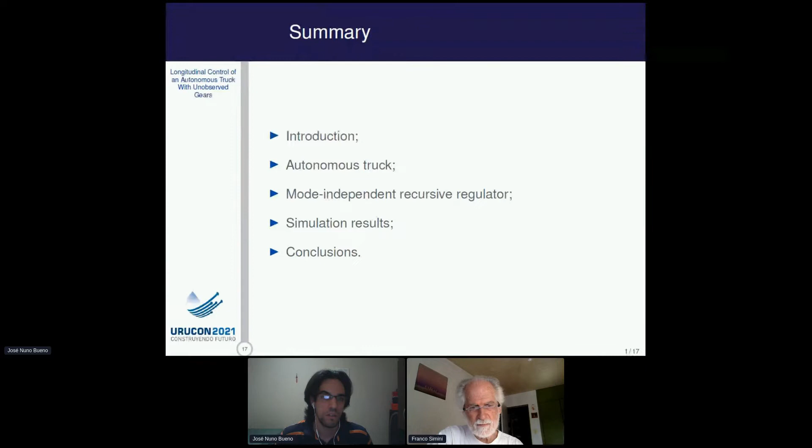Okay? So the presentation is organized in the following way. First, I will provide a brief introduction about the subjects we addressed in the paper, and then I will present and discuss the longitudinal model of the autonomous truck we adopted for this work. After that, I will present the mode-independent recursive regulator which we applied to solve the longitudinal control problem, and then I will present the simulation results. Finally, we will draw some conclusions about the obtained results. Okay, so let us start.

In the past few decades, Markov processes have been receiving more attention from researchers in the control area. Specifically, processes related to autonomous navigation of mobile robots, such as modeling, control, and filtering, can benefit from the Markovian approaches. To name a couple of examples, we have Savazzi and collaborators who use the Markovian approach to solve the localization and detection problem of robots in industrial environments. We can also cite Chhabra, Mathur, and Baths, who use the Markov-based method to address the navigation problem for a drone controlled via electroencephalographic signals by people with impaired mobility.

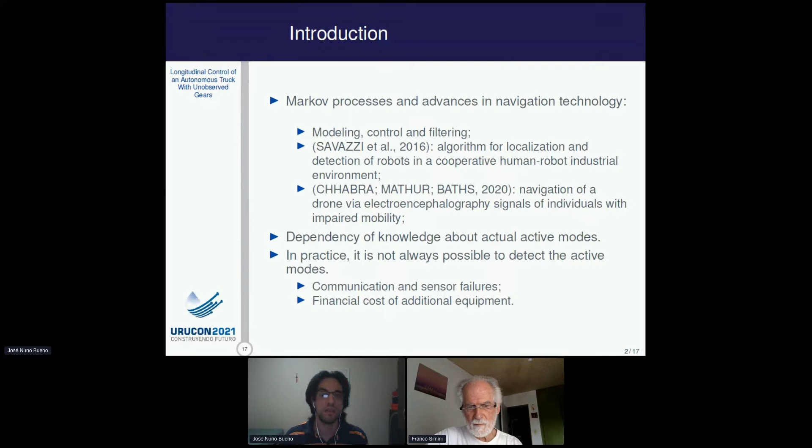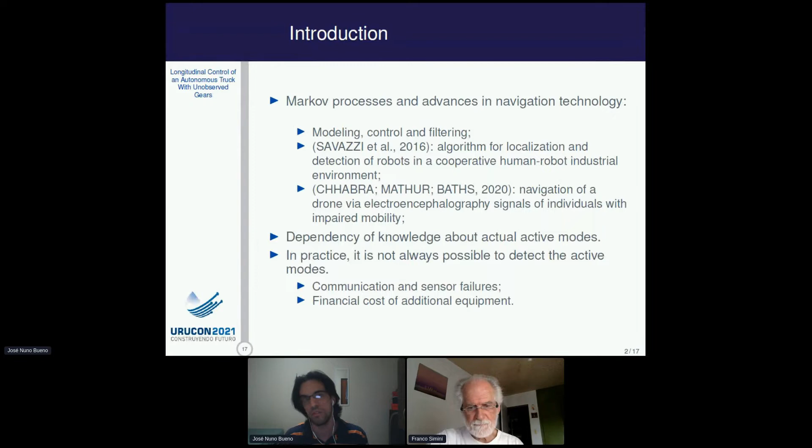In general, these Markovian approaches assume that the actual active mode is observed at every instant. But the detection of the active mode is not always possible in real world applications. In fact, the systems might be subject to communication and sensor failures, and the detection of the actual mode can demand additional equipment, such as new sensors for redundancy. It's important in this sense to have methods that do not require the observation of the actual active mode while the robot navigates the environment at all instants.

In this paper, then, we solved the longitudinal control problem with unobserved Markov modes for an autonomous truck. We modeled the longitudinal dynamics as a Markov process, where each engaged gear indicates the active mode. Then we define an augmented system based on auxiliary variables and formulate an optimization problem based on the classic least squares problem. The solution for this optimization problem will yield a recursive regulator, which we apply to solve the longitudinal control problem via state feedback. And then we present the simulation results to validate the approach.

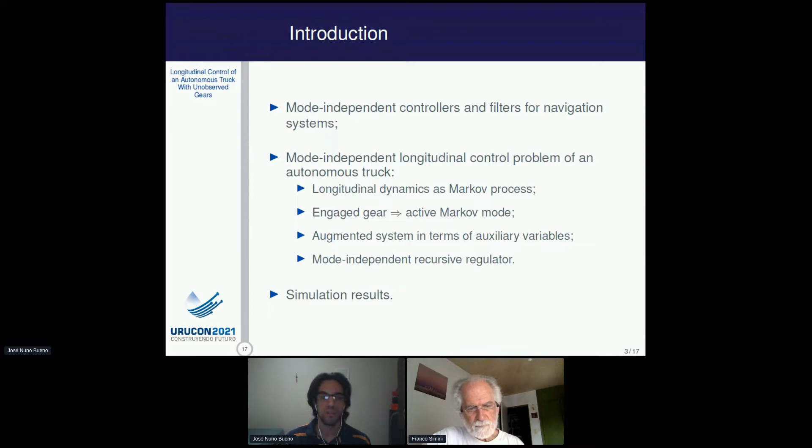So the autonomous vehicle we adopted in this work is the Scania truck presented here in figure 1. We consider that the system engages gears from 4th to 10th because the truck is unloaded. Okay? And we define the state space model given here in equation 1. In this model, the states are the drive shaft torsion, Q1, the engine speed given by Q2, and the wheel speed denoted by Q3. Okay? And our input is the normalized engine output torque.

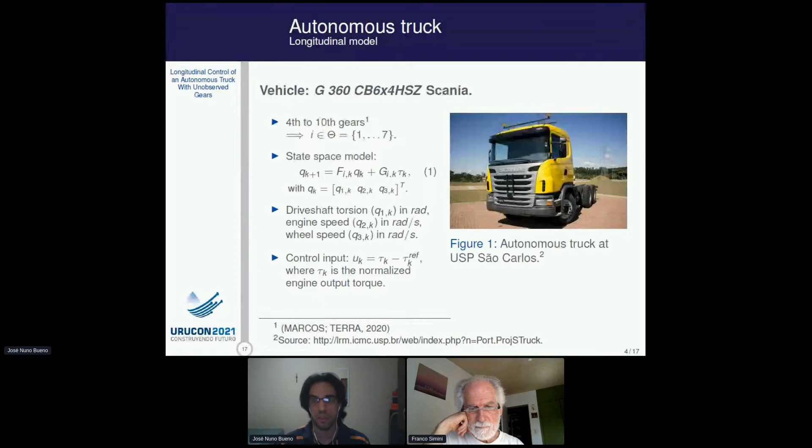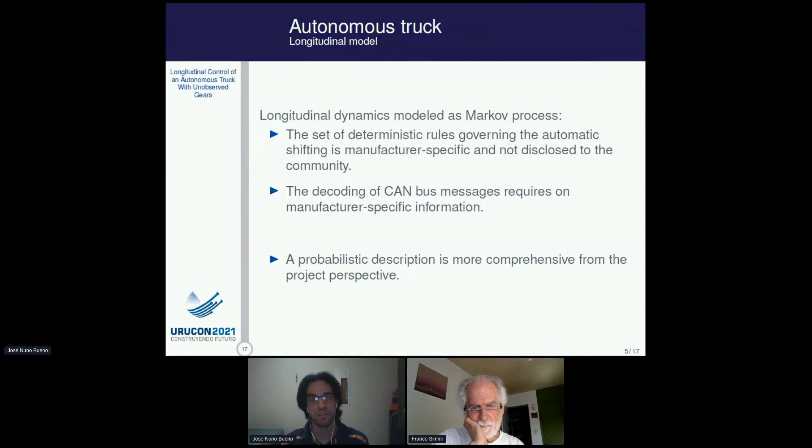And we model the longitudinal dynamics as a Markov process because in order to attain a deterministic model, we would need manufacturer-specific information, such as the set of rules governing the gear shifts and how we would decode and interpret the CAN bus messages. In fact, this information is usually withheld by the manufacturer and it's not disclosed to the community. Therefore, a probabilistic approach can be suitable to solve the control problem when we do not possess this kind of information.

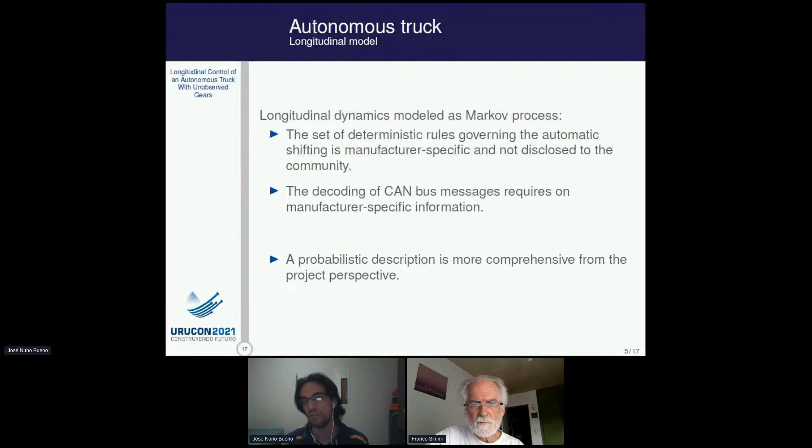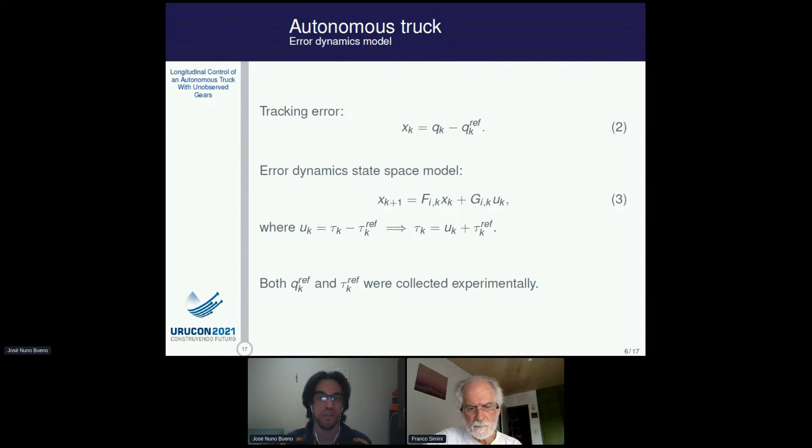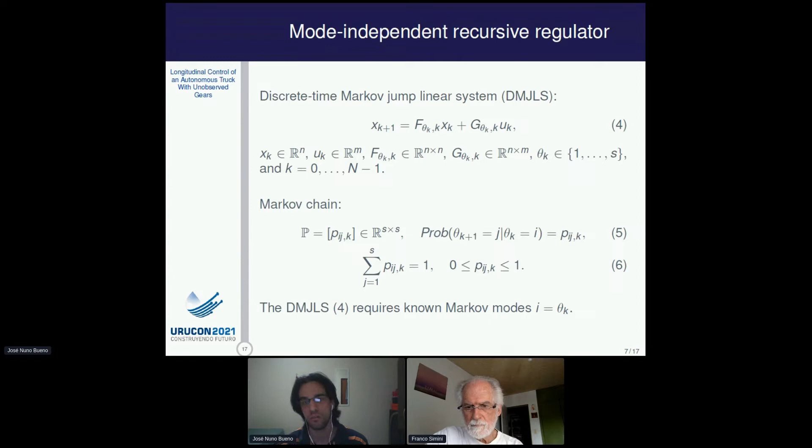Now, let me talk about the mode-independent recursive regulator we applied to solve the longitudinal control problem. We consider a discrete time linear Markov jump system, as the one presented here in equation 4. In the system, the Markov chain is orchestrated by the transition probability matrix P, with the general characteristics outlined here in equations 5 and 6. This set of equations, 5 and 6, is well known in the control field regarding Markov processes. Okay. Next slide.

We then define the auxiliary variables zk and vk based on state xk and uk respectively, as shown here in equation 7. Observe that all the entries in zk and vk will be 0 except for those related to the actual active mode. Because of that, we can recover both xk and uk by adding up the entries in the auxiliary variables zk and vk. Here in equation 7, we see that if we sum up all the entries in zk, we will have xk because of the Dirac measure function here, which is 1 if the actual mode is i and 0 otherwise. So all the entries will be 0 except the one which is multiplied by the function related to the actual active mode.

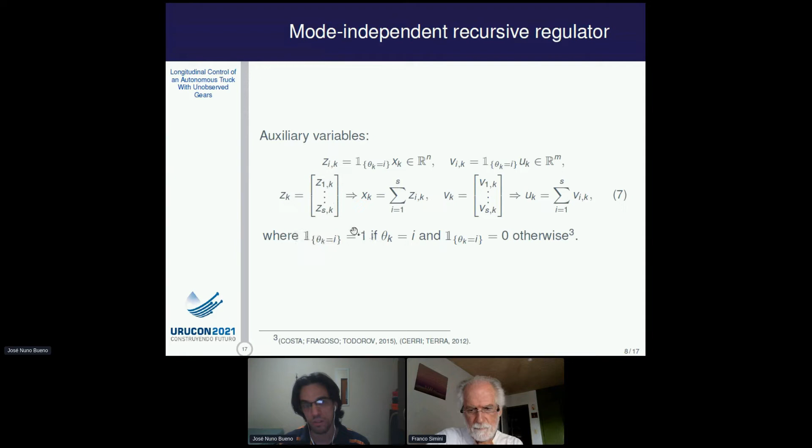However, we do not have the information to evaluate this function, the Dirac measure. Therefore, from equation 7 and after some algebraic manipulation, we obtain an augmented state space model in terms of zk and vk, which comprises all the modes at once. In this case, the information about the active mode is grouped into the unknown parameter capital delta k. And as we will see in the next slides, the capital delta k will not take part in the solution of the problem we formulate. Here, as you can see, all the Dirac measure functions are grouped into the capital delta k. And these Dirac measures are the information we lack, the information we do not have.

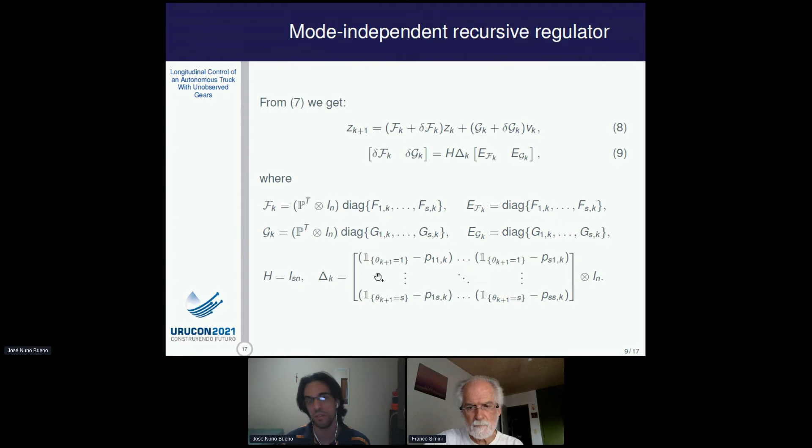Then, to address the regulation problem, we can define the minimax optimization problem in equation 10, based on the augmented model we just defined, with a quadratic cost function given in equation 11. Here in this quadratic cost function, the matrices P, Q, and R are positive definite weight matrices, and the parameter μ is a penalty parameter, also positive. Okay?

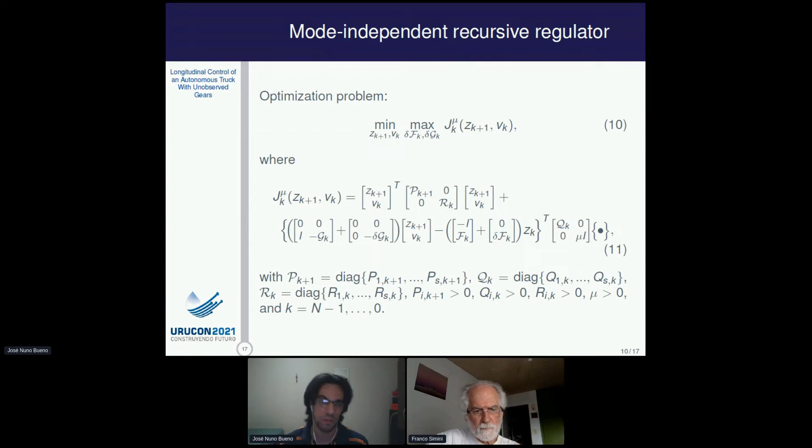Then the solution for the optimization problem is provided by Cerri and Terra, and is recursively given by equations 12 and 13. In equation 13, we have L as the equivalent closed loop matrix of the system with the regulator. K is the state feedback gain of the regulator. And P is the solution for an algebraic Riccati equation.

Observe that the solution is related to the auxiliary variables zk and vk. Even though the solution is designed for the augmented system, as we saw in the past slides, it's possible to recover the states and inputs xk and uk of the original system.

Another important aspect of this solution is that it's not affected by the unknown matrix capital delta K, which, as we saw in the previous slides, contains the information about the actual active mode. In fact, we see here that in equations 12 and 13, there is no capital delta K. It does not take part in the computation of the feedback gains. Therefore, it's possible to obtain the state feedback gain despite the lack of information about the active Markov modes. Okay?

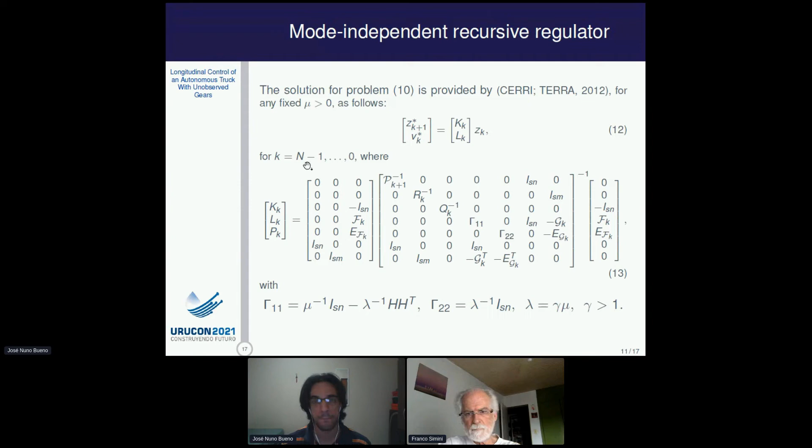Now let us go through the simulation results. For this simulation, we consider a run of 160 seconds with a sampling frequency of 10 Hz, and therefore our time horizon is 1,600. Also, we assume that the truck starts in the 4th gear with an initial tracking error given by x0. Here, this vector π0 represents the initial probability distribution of the first mode, and since it's 1, 0, 0, 0, 0, we say that we are sure that it starts in the 4th gear. Okay.

And we set up the quadratic cost function of the minimax optimization problem with these sets of parameters, the penalty and these weights. And from equations 12 and 13, which provide the solution for the problem, we obtain the feedback gains K. Here, I omit the numerical values of the feedback gain K, because it has 7 rows and 21 columns. It would be just a whole bunch of numbers here. Okay, so I omit. Okay.

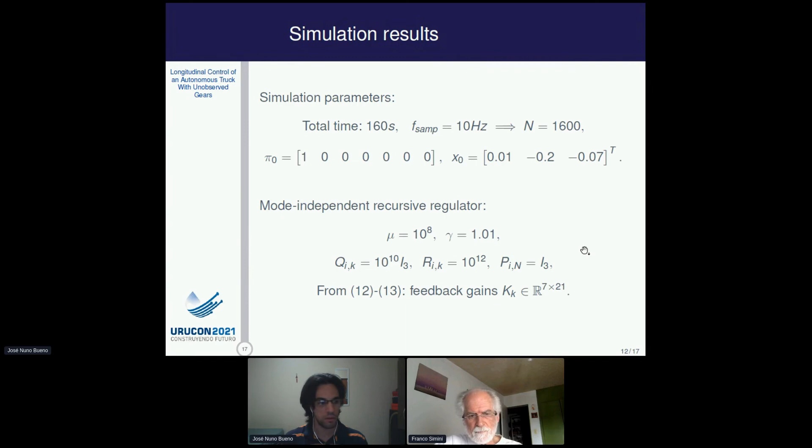I would like to ask you, José, to kindly maybe speed up your last 2 or 3 minutes because of our schedule problem. Okay. Thank you very much. Okay.

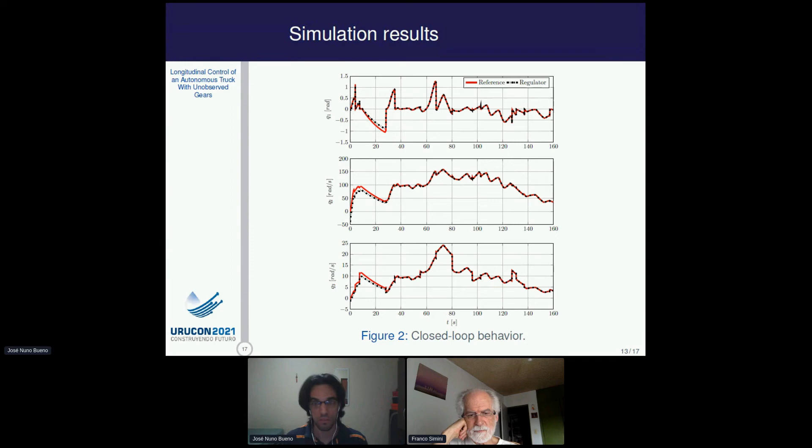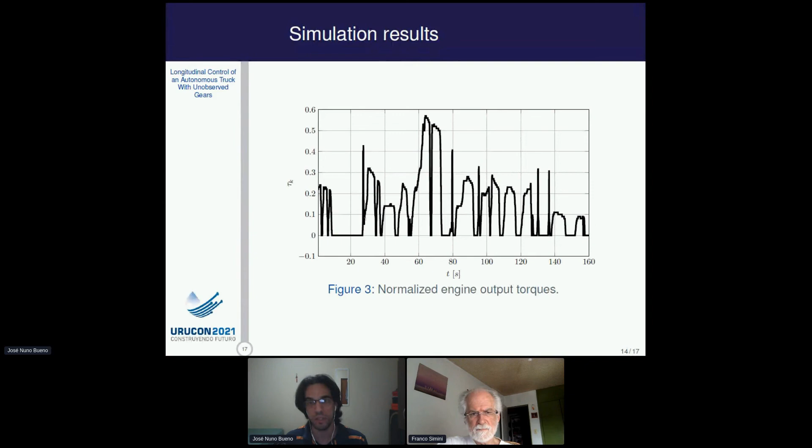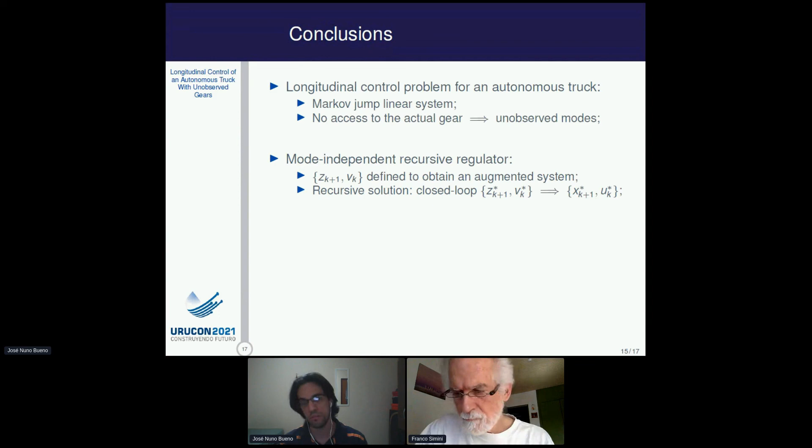Now, to finish, we addressed the longitudinal control problem of an autonomous truck, in which we model the longitudinal dynamics as a Markov process, and we assume that the gear shifts, hence the active modes, are unobserved. We solved the control problem by applying a mode-independent recursive regulator, and to do such, we formulate an augmented state space model based on auxiliary variables and define the optimization problem. As we saw, the solution for this optimization problem yields the feedback gains we need to solve the longitudinal control problem.

Based on reference trajectories collected experimentally, we carry out the simulations, and the results show that the system successfully tracked these reference trajectories while requiring feasible torques that would not damage the engine. As such, the approach has potential for application on other types of ground vehicles whose dynamics can be modeled as Markov jump systems with unobserved modes. Finally, for future works, we intend to investigate the problem of longitudinal control when the matrices of the truck model are subject to parametric uncertainties.

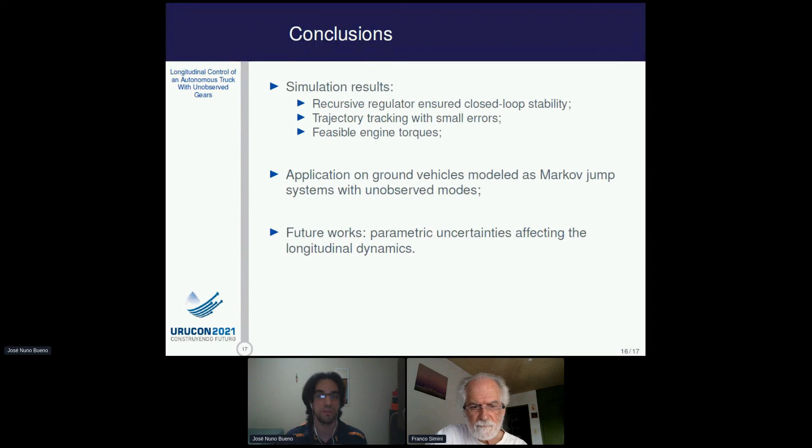Thank you very much, José. This was an excellent presentation. It was not your fault. You started late and we're catching up the time. It was very interesting. We only have time for one urgent question.